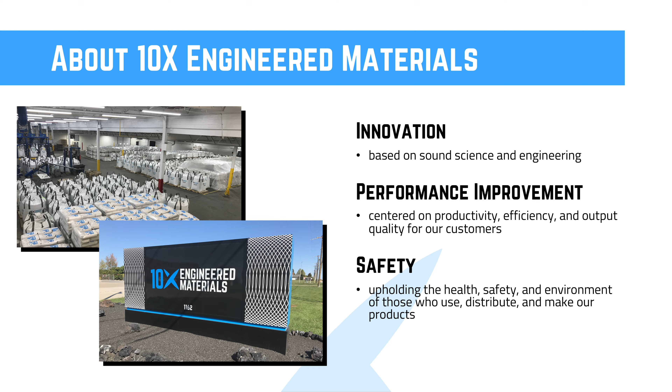10X abrasives are made from a mineral melt that is rapidly cooled into a solid. This does several important things in a blast abrasive where the objective is to quickly and safely produce a quality surface ready for coating or use. First, it creates a completely amorphous particle matrix, which means that there are no crystals in the material at all. X-ray diffraction scans confirm this. It tempers and toughens the particles, enabling them to deliver more of their energy to a surface than other abrasives, even harder and sharper abrasives, which we'll talk more about.

It makes the particles uniformly strong. There are no pores or fracture planes where the particles will tend to break, embed, or form dust. And the shape of the particles is unique. There are sharp particles and rounded particles and everything in between.

And all of this adds up to an abrasive that's fundamentally different from what has been on the market for the past several decades. It's completely safe for workers, low dust, exceptionally productive, and leaves a pristine finish on metal surfaces. We'll show you how it delays rust bloom and improves coating and bonding performance.

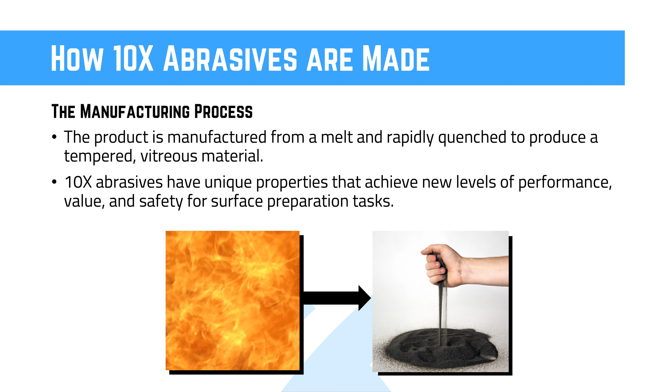We have had so many people ask us, what is this stuff? And then we'd start in on how it's made, how the particles are stronger, how they deliver more energy, how they don't embed or initiate rust bloom, and so on. We decided that we needed to name this category of abrasives.

Since there is no existing word or scientific term that would accurately describe it, we borrowed from metallurgy and mineralogy and constructed a new scientific term, superoxalloy. It's a composite of the terms alloy, superalloy, and oxide.

A superoxalloy is an alloy of mineral oxides that is formulated and processed to be extra strong and have superior properties compared to conventional mineral abrasives. Superoxalloy goes a long way in answering that question, what is this stuff, in one new scientific term.

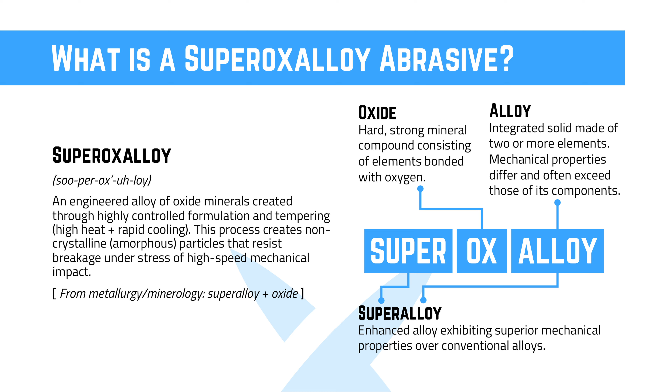So most mineral abrasives in the surface preparation industry today are formed in an uncontrolled environment. For example, mined abrasives are formed in the Earth's crust over millions of years, which means you get what Mother Nature produced, and that varies from location to location. They often contain crystals like quartz on varying scales and have unavoidable pores and weak planes that can result in particle fracture when a strong force is applied.

So what's different about a superoxalloy? First, it's formulated and manufactured in a controlled process. The mineral mixture and processing conditions are selected for material strength and performance, but also health and safety.

It's amorphous. There is no long-range molecular order, which eliminates fracture planes and makes the particles uniformly strong in all directions. Rapid cooling of the melt also tempers and further strengthens the particles. Amorphous also means that there's no crystalline free silica.

We routinely have third-party labs do controlled testing on samples of the abrasive, which is the gold scientific standard for determining whether a material can possibly create an environment that exceeds exposure limits for respirable free silica, beryllium, or any other hazardous substance.

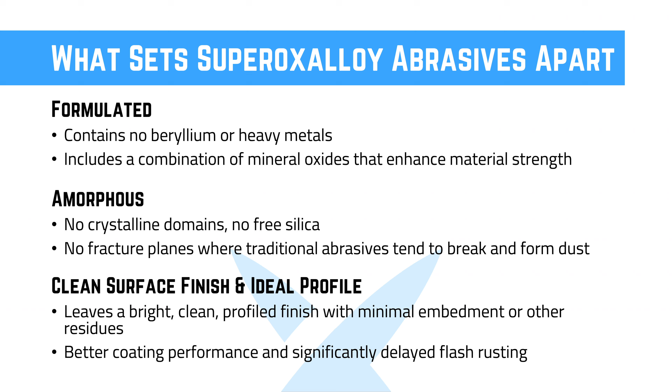So over the past 18 months, we've been seeing results that left us scratching our heads. One is a constant and significant combination of faster blasting and lower abrasive consumption compared to abrasives in other categories.

Another is the ability to quickly remove extremely difficult coatings that even harder and sharper abrasives can't remove. Some examples include Viscotaq pipe wrap and multiple layers of baked and hardened powder coat.

Another interesting attribute is the relationship between blasting speed and nozzle pressure, which appears to be unique with our abrasives. The performance of the abrasives continues to improve as pressure is increased to 120 psi and even to higher pressures. It's common to see the performance of abrasives level off or even decline at these higher pressures.

We encourage our customers to get the pressure up if they can because the material just comes alive and the results can be amazing. Getting our minds around this as scientists and engineers is what led us to the superoxalloy category. The short story is that blasting at its core is an energy transfer process. We invest in compressors and fuel to accelerate particles to a high energy state with the objective of delivering that energy to a surface as efficiently as possible.

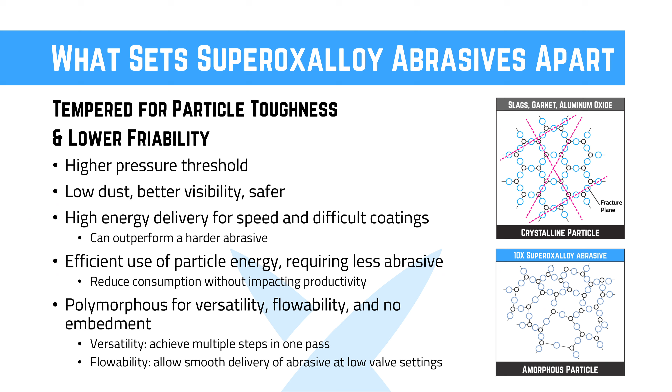So we are very excited today to formally and publicly introduce 2 new abrasive product lines. KinetiX is essentially the products we've been selling for the past year. It's comprised of our coarser grades for use in high production, larger scale blasting jobs. EpiX is our finer fractions that have proven to produce tremendous value in more specialized fabrication, device and equipment manufacturing, and their associated coatings applications.

KinetiX means high energy delivery. KinetiX is the product line for large production jobs like shipyards, bridges, tanks, and rail that involve thicker coatings and require deeper profiles. In these applications, the blasting process can dramatically affect the overall economics.

Not only is KinetiX faster, but it also minimizes the massive cost of assets being out of service because of rust bloom, coating quality issues, or the time and cost of rework. KinetiX is also reusable in reclaim systems and poses no harm to people or the environment, which we've discussed.

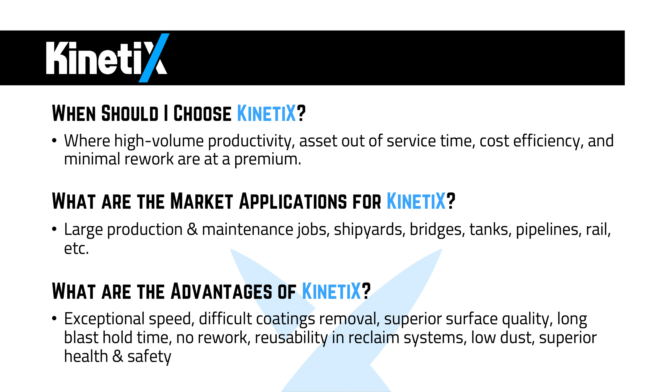KinetiX comes in 4 mesh size ranges. The coarser 1020 and 2040 are better in applications where thick coatings are being removed and replaced and a deeper anchor profile is needed. 2070 and 4070 are fantastic all-purpose abrasives for that 2 to 3.5 mil profile and removal of everything from mill scale to thick and hard coatings. KinetiX products are available in 50-pound bags, 1 and 2 ton super sacks, or by bulk truck.

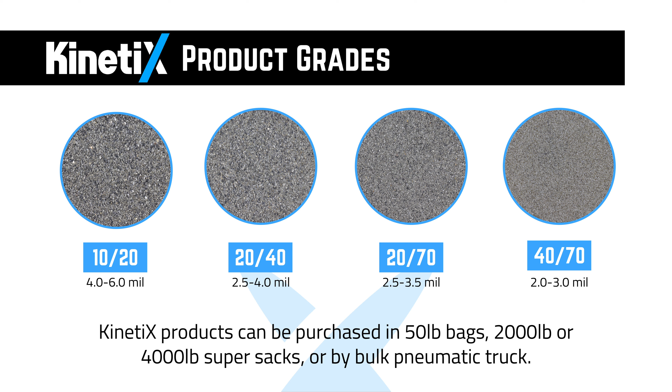And it turns out that rusting of bare metal is an inherently slow process. It can only happen quickly if there are iron or water-soluble salt residues left behind with embedded particles to initiate and accelerate the corrosion reactions. Rust bloom is delayed with 10X abrasives because they leave a clean, bare steel finish. Our shipyard customers are noticing. Just recently we had a section of a ship that was blasted to an SP6 finish and then had to sit before being recoated, and after 3 weeks it was still SP6.

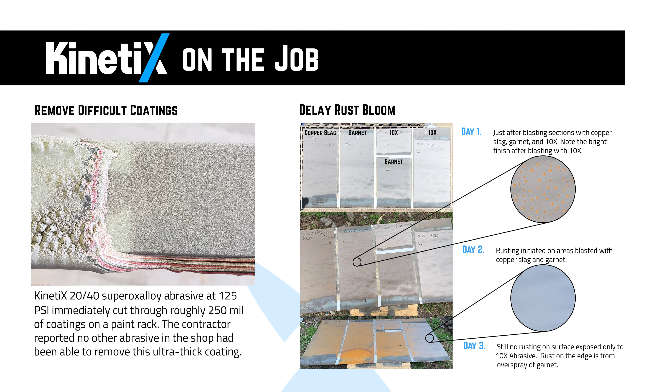So EpiX means epic. It's an awesome set of products. EpiX can replace and outperform exotic abrasives like aluminum oxide, silicon carbide, and ceramics, but at a much lower cost. EpiX is a product line for applications where surface quality, cleanliness, precision, appearance, and reusability of the abrasive are at a premium. Like the KinetiX grades, EpiX is fast and effective on the most difficult coatings.

We're working with several powder coat customers to eliminate burn-off ovens and chemical stripping because they're no longer needed. But what we're finding in these markets is that cleanliness, surface quality, and reusability are the drivers in device manufacturing and specialty coatings applications. And EpiX is highly recyclable. We have customers who are getting more than 12 uses.

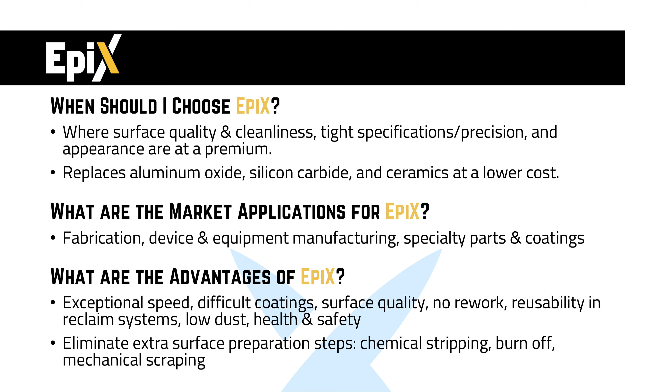EpiX comes in 3 grades. EP stands for Enhanced Profile, MP is Medium Profile, and LP is Low Profile. And EpiX is also available in 50-pound bags, 1 and 2 ton super sacks, or by bulk truck.

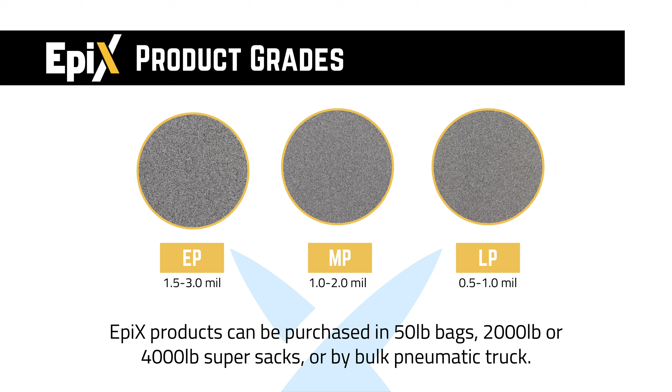So the field cases that we're going to show you illustrate how superoxalloy abrasives can outperform harder, sharper, and more expensive abrasives. These are some of the results that truly had us scratching our heads for an explanation. The picture on the left is of a hanger hook used to hold powder-coated parts as they are cured in the oven. The hooks had multiple layers of baked-on powder coat that was barely dented by aluminum oxide after 2.5 minutes. EpiX MP was able to completely clean one side of a hook in about 20 seconds and leave an SP5 finish.

The picture on the right is of a lid with a primer layer and a powder top coat. The shop was pleasantly surprised at the level of control they had when blasting this part with EpiX LP, our low-profile product. They could decide whether to remove only the top coat or to blast the bare metal by adjusting the nozzle distance.

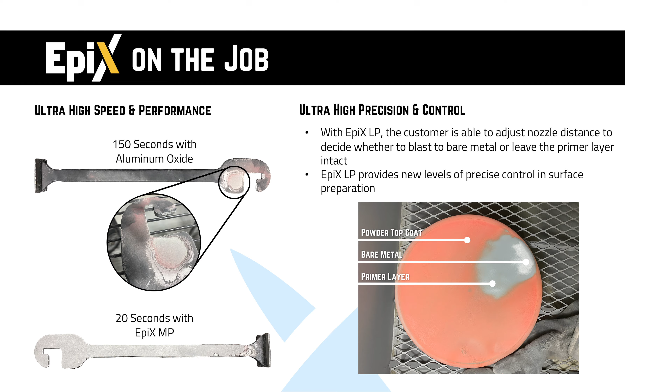And this final case study encapsulates everything that we've been discussing in this webinar. It shows the quantum leap improvements in quality and economics that are possible with superoxalloy abrasives. The pictures on the right show a tungsten carbide asphalt milling and removal bit that is used to break up and remove asphalt from roads and highways. The manufacturing process involved first tumble blasting the tips for 30 to 60 minutes using silicon carbide, cleaning the underside of the tip with flux cleaning agent, and then braze bonding the tip to the base of the bit.

The brazed bond in many of these parts would fail at well under 8,000 psi in a test press. With EpiX EP, the blasting time was reduced to 10 minutes, and the underside of the tip was clean and ready to bond without flux. When the part was tested for strength, the tungsten carbide cracked at 18,000 psi before the bond failed. So using EpiX on this job resulted in a 67% reduction in surface prep time, elimination of a cleaning step, and a 125% increase in part strength compared to silicon carbide, which is among the hardest and most expensive abrasives available.

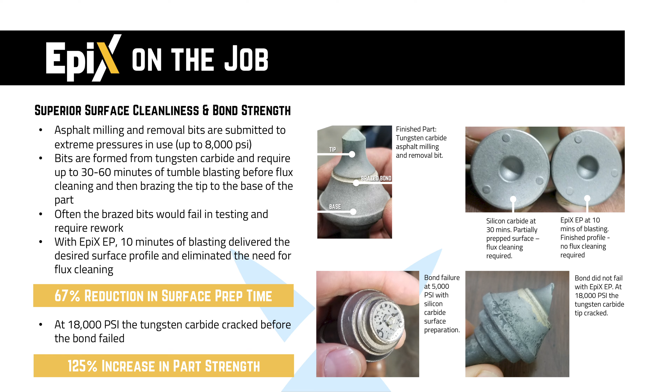Now, we would love the opportunity to help everyone on this call experience this breakthrough. When it's set up and used properly, it is truly remarkable. And I'd like to share a quick story with you. We have a new customer who called us out of the blue because he saw one of his competitors complete a job in 7 days that he usually bids 25 days for. And he told us that he saw 10X on the site and had to call because he couldn't let his competitor take his business.

KinetiX and EpiX superoxalloy abrasives will keep your workplace and workers safer and healthier. They will enable you to do the hardest jobs faster. They'll decrease or eliminate your dust headaches. They will minimize rust bloom, rework, and get assets back in service faster and with higher quality. And now we have product grades for everyone, from the high volume blasters to equipment and specialty device manufacturers.